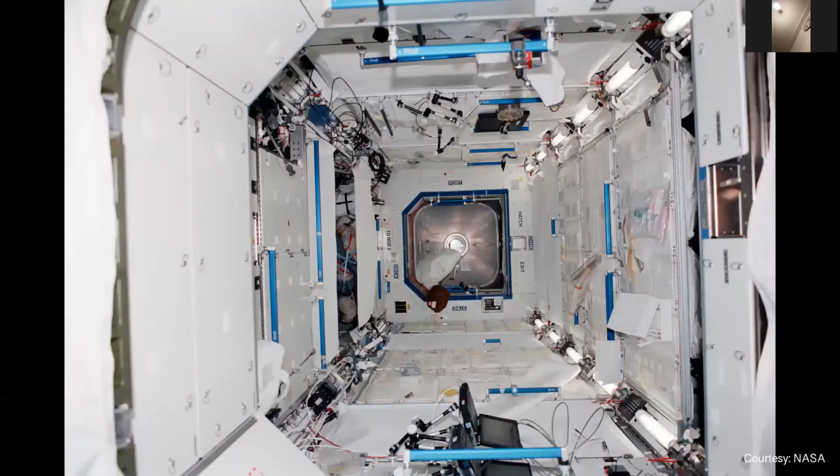So this was the movie 2001 as a short introduction of what people are thinking of when they probably visualize space architecture. In 2001, this is the Destiny module of the International Space Station. So this is what we got in 2001, not this grand structure, but the International Space Station and this particular module.

You also saw before the shot, it was very pristine in the interior. It looked very clean, as does this module when it was delivered to the space station. And then this is what it looks like today. Sometimes, not all the time, but you just have to imagine. Sometimes we think, oh, it's all messy and it's crowded, and it's true. But we also have to think that the space station is now 25 years old, more or less.

It has no wireless connection, so you have all these cables here. Astronauts are constantly rebuilding, doing different elements, and there's hardly any download capability, meaning there's lots of stuff coming up, but hardly any stuff going down. All the trash—you can't just burn everything in the Earth's atmosphere, because a lot of things you'll also need maybe more than one time. So it's like, just imagine you're living in a small flat, and you don't have any place to put things, you've been living there for many years, and things accumulate.

What's interesting is that in the 70s, jumping back a little bit in time, there were a couple of concepts which are also sort of eclectic and grand. This is the Stanford Torus. This was actually conceived at Stanford. It was a NASA-sponsored program in 1975, and it also used the concept of a torus, right?

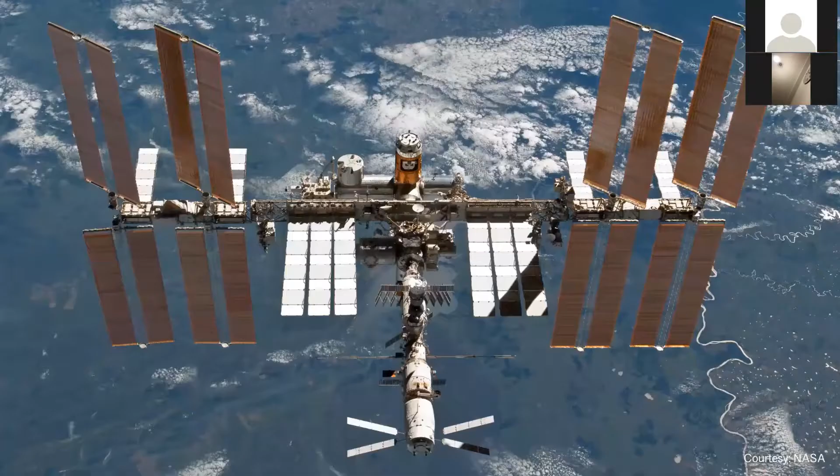So you see how imagination and reality, how different they are, but also how they inspire each other in a way. So let's look at the space environment, distances and destinations a little bit.

Then we have low Earth orbit, up to 2,000 kilometers, and within that is the International Space Station. So the ISS is actually very close, super close - just a distance between Rome and Modena. If you imagine Rome to Modena, maybe a 4 hour drive, and then you just go up a little bit instead - there is the International Space Station.

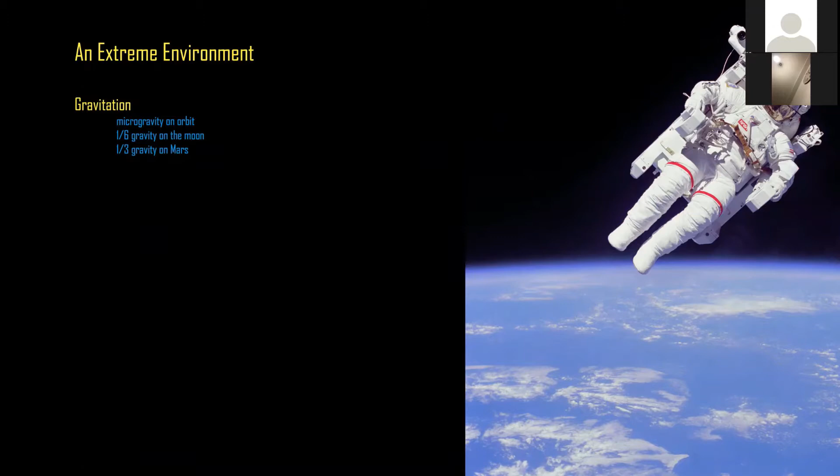Outside temperatures are very harsh, very extreme - minus 156 to plus 121, depending of course on the material. And towards the black universe, you have minus 250 degrees Celsius. So there's a lot of different temperatures.

So when you look at that spacesuit, let's look at that - you see some sun here, you see some shadow here. On the back side it would be very cold, on the front side it's very hot. That's why astronauts wear underwear with water-filled tubes to modulate the temperature of the body. And of course these suits are completely airtight - it's a pressurized environment, a small spaceship, because you have a vacuum outside, and that makes for extreme temperature but also pressure differences. You have zero pressure outside, and maybe 1/3 to 1 bar inside the spacesuit, depending on your oxygen levels.

But already in low Earth orbit you have to take care of micrometeorites - high-speed impacts of grain-size objects. There was, I think it was Luca Parmitano, when he went out for a spacewalk, he could see bubbles coming up from his glove's thumb or finger. So he knew there was a leak in his glove, and what did he do? He said, 'Houston, I'm coming back,' and immediately went back to the spaceship. So it's a quite dangerous environment.

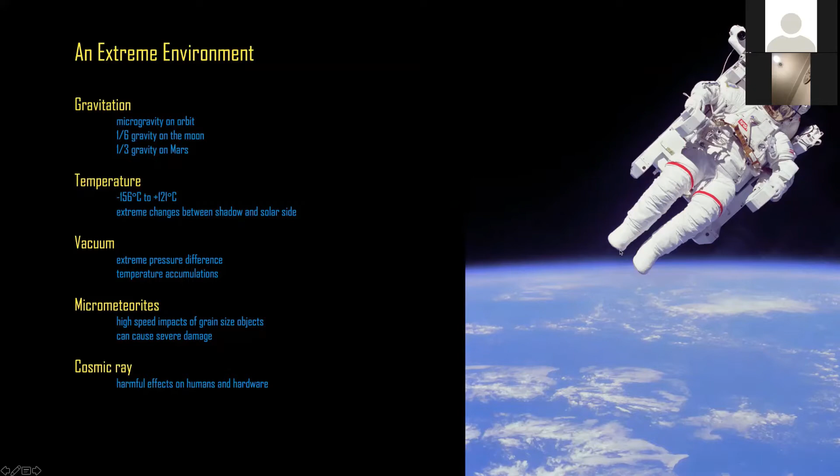And you have cosmic rays, because you're not protected by the Earth's atmosphere anymore, so you have larger radiation which you have to protect yourself from.

So that leads to a couple of challenges for building and living in extreme environments in space. First of all, you have to transport large distances. You have to always think about what do I really need, what do I need to supply, can I recycle everything so I hardly need any supplies. This is an important issue, the recycling, and Anna Maria mentioned it in the introduction. This is one of our concerns. When on Mars, you probably have a delayed communication, so you have to be very autonomous, very independent. You have dynamic launch loads, so you have different things to take care of, and you have a shortage of space, meaning a minimized space.

That could lead to a strategy, an architectural strategy about deploying and transforming elements. So I don't only have one chair, but a chair could also, on Mars or in zero gravity, transform into something else, into a bed or so.

And one would also look, as you can see here in the image, at building with in situ materials. What materials do I have locally, and how can I build structures? We know this from Earth, because when you look at, let's say, Mali and all these mud clay houses, these are really in situ buildings. There are these artisan and adobe houses, we also know that from North America. This is probably a strategy we will also follow when we go to the moon or to Mars.

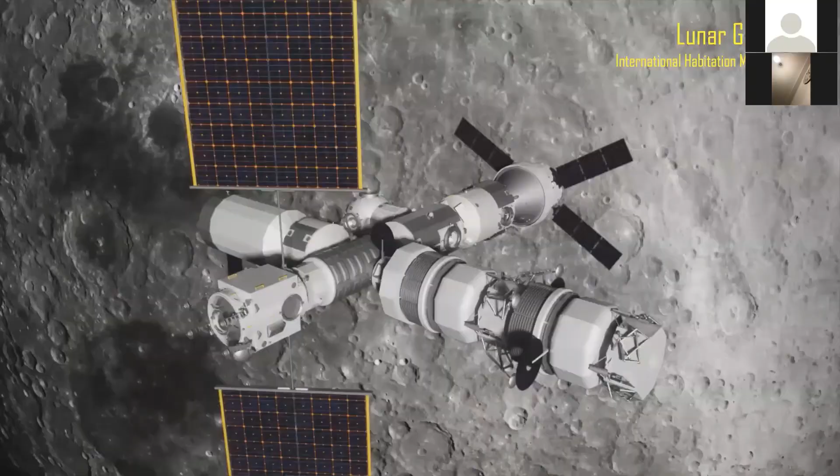I'd like to start with a project. So with this introduction, you have a little bit of a feeling for the requirements and the parameters we need to look at when we design for space. I'd like to show you a project, the Lunar Gateway, which Anna Maria mentioned. We are currently working for Thales Alenia in Turin, because they are building the International Habitation Module, and we are doing the interior configuration design. They are not only building the hull, the envelope, but also the interior, the full thing.

Here is one configuration, and what I'm showing here is actually our previous study where we worked with Airbus and Thales Alenia on the project. It's a small configuration. This is the International Habitation Module, this is the stack for the lunar lander. You see here the legs and some other modules. This is the Orion here, this is the propulsion module, and these are other logistics modules.

The final configuration, to be honest, is not set yet, so there's always room for changes.

I'd also like to mention, because it sometimes gets mixed up, that Artemis is not Gateway. Artemis is the American program, and Gateway is the international program where Europe plays a main part. The interesting thing with Artemis is that these women are all candidates to land on the moon, as Anna Maria also mentioned in her introduction. First we will see in the next years the first woman walk on the moon, and they will also probably visit Gateway and the International Habitation Module.

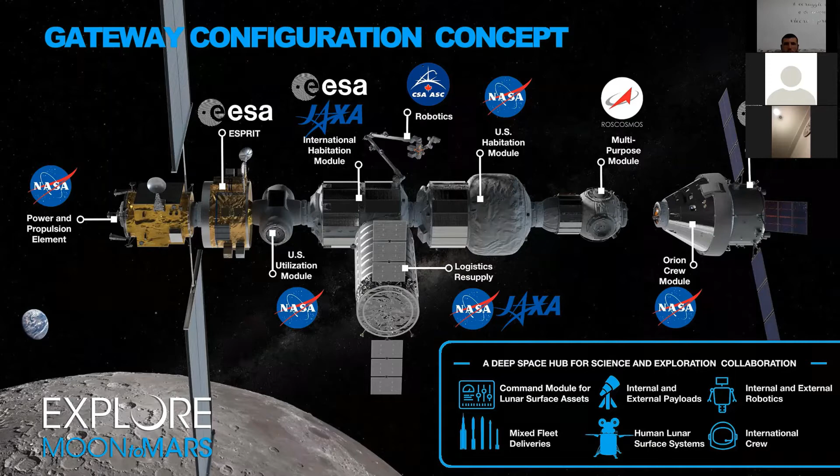This is another configuration for Gateway. It's larger, and you also see here that there are different ESA components. It's mainly the space station partners, NASA, JAXA, Canadian Space Agency, maybe Roscosmos, also not sure yet. So it's basically the same big consortium which built the International Space Station.

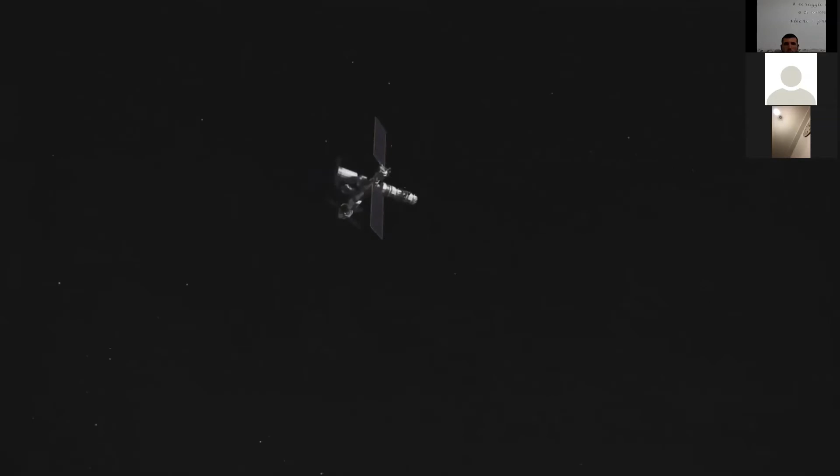I'll show you a little animation from the design, which will explain a bit more about the actual design we did. While the space station is in low Earth orbit, Gateway is much further away, 1,000 times further, so it's a more dangerous environment. There are many unknown factors, and before going to Mars, we really need to learn how it is to go around the moon, to be in this more extreme environment than low Earth orbit, with more extreme radiation, and to train for this.

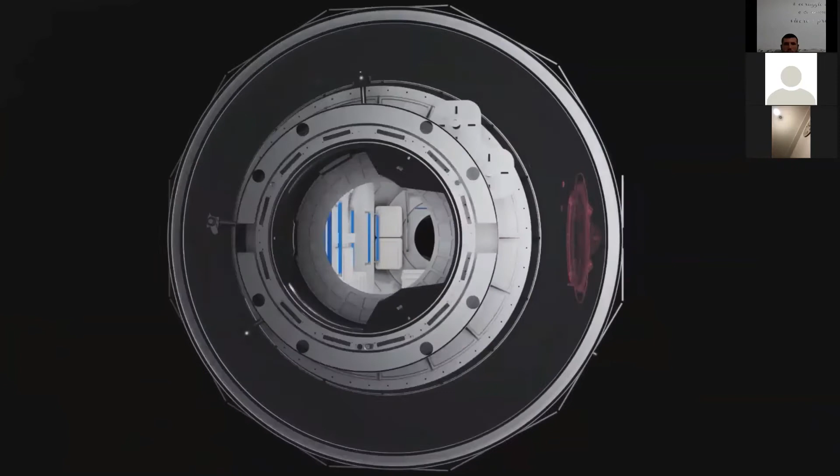So here you see this is the International Habitation Module. This is the current version we're designing. I can't show you anything of this, but this is an older version, and it shows you what the crew functions are - exercise facility, crew quarters, galley and science. So everything a crew needs to inhabit a space like this is packed into one module.

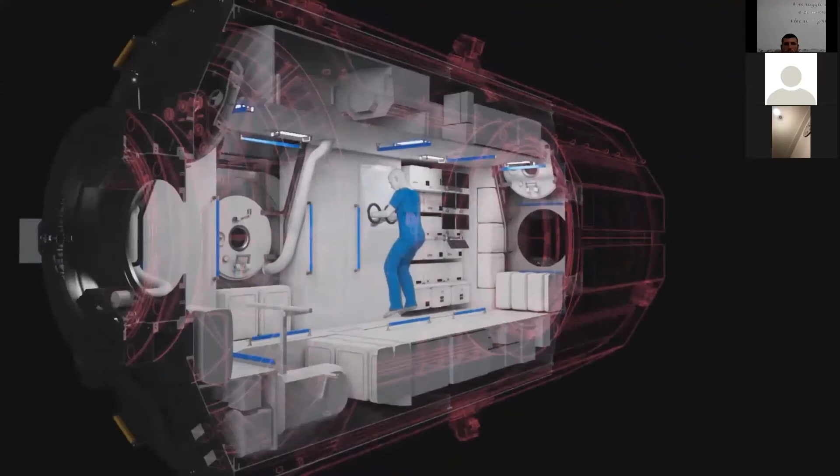This is 5 meters in length and 4 meters in diameter, actually 3 meter 50 in diameter, and now we had to shrink it even a little bit more. So you see it really is a very challenging design task.

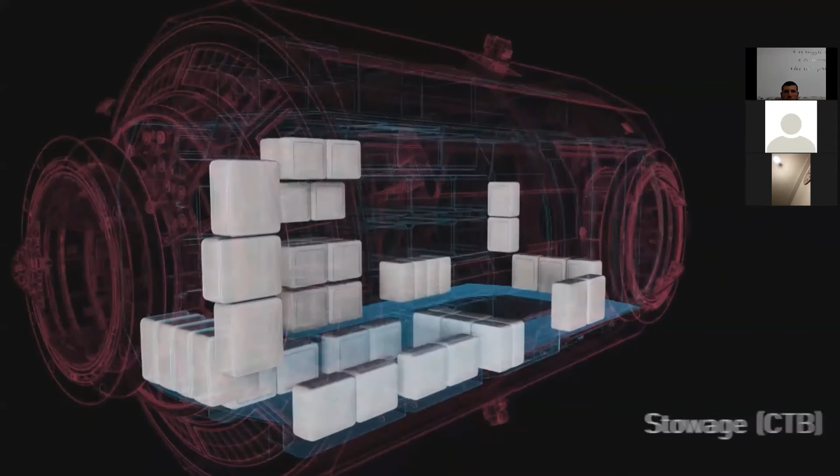So what does a module like this comprise of? What are the main elements? Very important is stowage - we always need somewhere to stow supplies and food. We'll also have a little kitchen, a galley with a food warmer, and a trash compactor. We'll have a table, very important for social gathering, for having the crew of 4 come together for dinner.

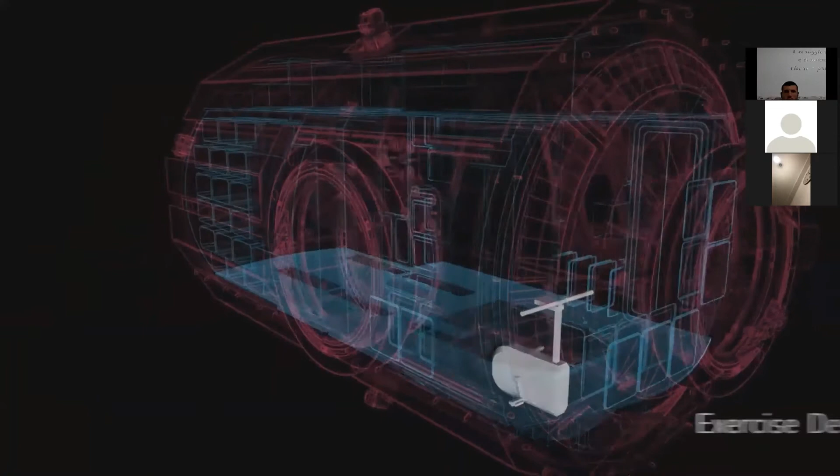Exercise facility, we have crew quarters, and here you see this is deployable. So we try to have one status of the crew quarters during the day, and during the night the private spaces become more important, and the crew has a larger space to sleep in.

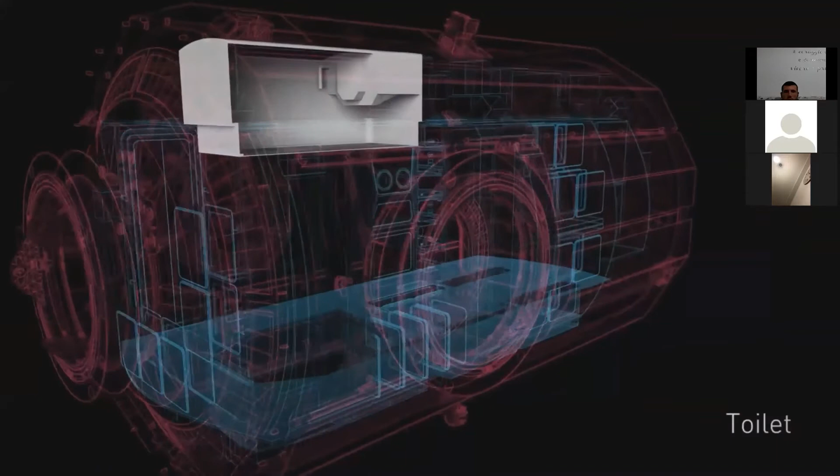There's the toilet. It's also deployable because only when you need it do you have a larger space, and otherwise it's really smaller. This is the glove box.

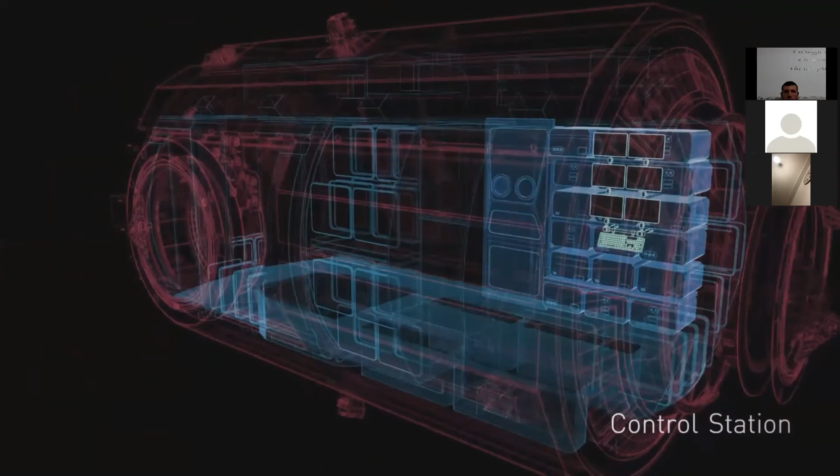So this is the science equipment, basically right next to it, and the control station. We assume the station will be controlled basically by tablets. These are system boxes and the life support system, and together they take up quite a lot of space.

And currently they are developed by JAXA, the Japanese Space Agency. And this view really gives you a glimpse into the small space.

The good thing about zero gravity is that space appears to be much larger because we are floating and we can access all different sides. You saw that with the toilet - it was on the top, although there's no real top. And it's important that the crew can come together and exchange stories, maybe talk about the day, and have a dinner together.

So this was a design we are currently working on. It's going to be real flight hardware in a couple of years.

Before that, going backwards a little bit in the timeline - we were working on other projects which led to our engagement in IHAB. This is the project SHEE, the Self-Deployable Habitat for Extreme Environments. This is really about the deployability of spaces. SHEE is meant to be a test bed.

You see that in the simulation - it's a test bed for simulations on Earth. This is in the Mars analog area in Rio Tinto in the south of Spain, in Andalusia.

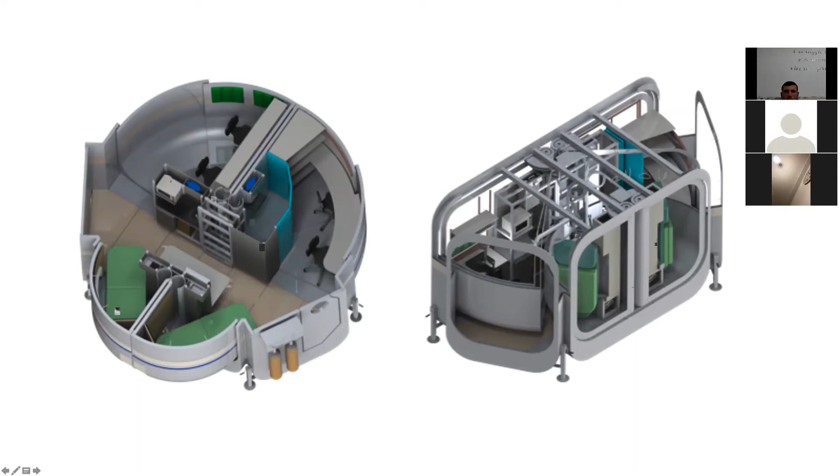And then it looks like this - this is it being deployed. This is during the making, and here you see a little glimpse of the inside. You'll see more later. That's why you can transport it on land to different analog sites to use it as a test facility.

On the other hand, you can dock different SHEs together - SHE is a nice word, right? It's not he, but she. And you can also put it, you know, back to back into a large launcher. This was the Energia, but it could be any other large launcher. It's 6 meters in diameter here.

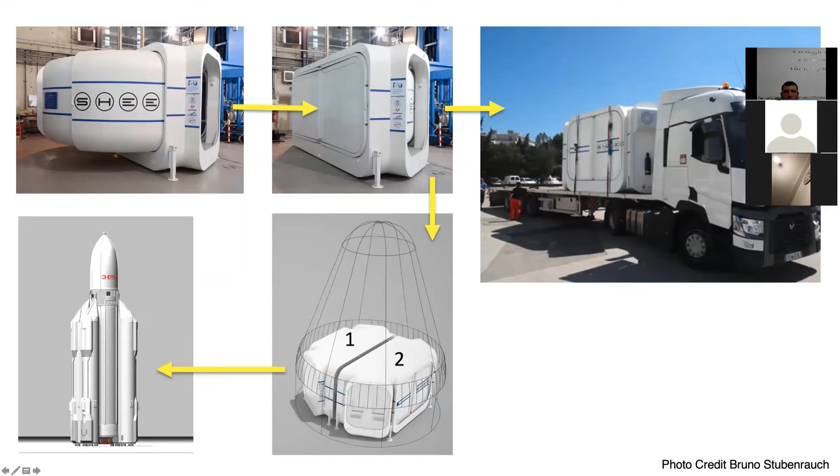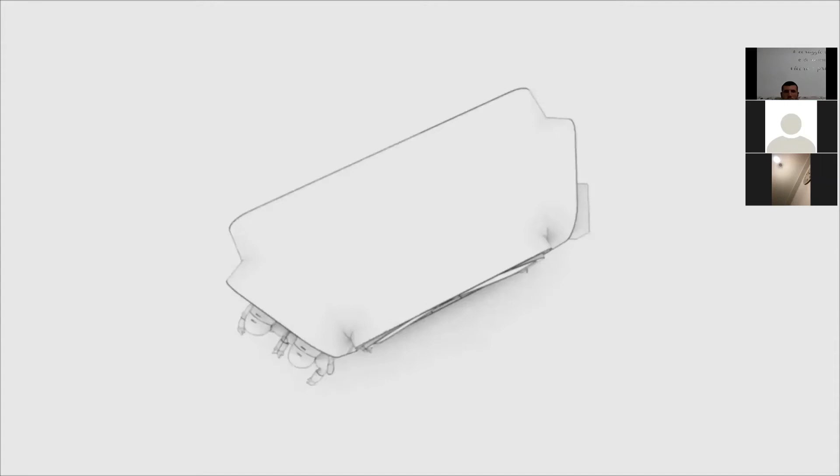So from this, I'll only show the deployment mechanism. I shortened it a little bit because of time, so here you get a little bit of a glimpse of how it's being deployed, these petals. The middle is sort of the size of a standard ship container. Here you also see the suit port.

This is the galley, so this is where people come together and sit. This is the public area, sort of, which is very important. And here are the private areas.

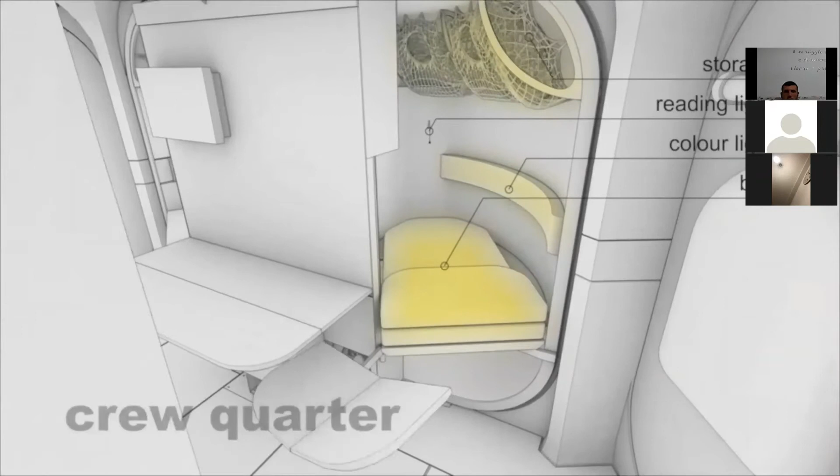Because of the space and the way it's designed, I lived in the SHE, and I have to say you hardly hear anything from the other side, and it's all without doors. It's just through the shape and the geometry. Here's the work zone; we also established acoustic panels here.

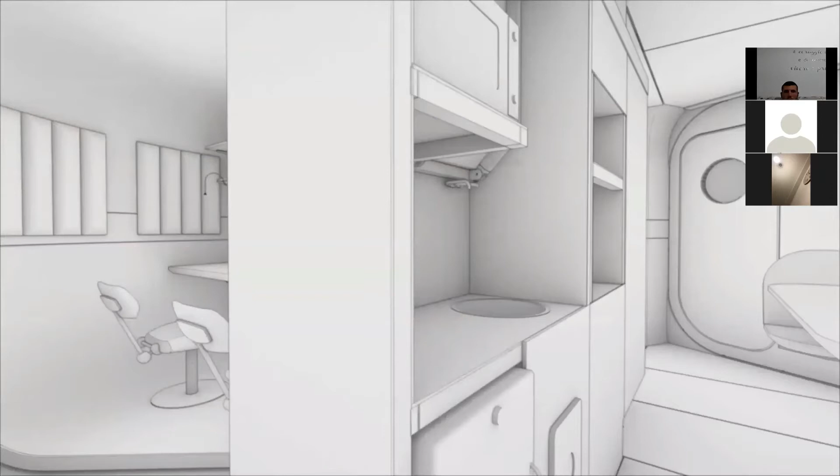I hope the video runs well. And this is the middle zone with the small galley, the refrigerator.

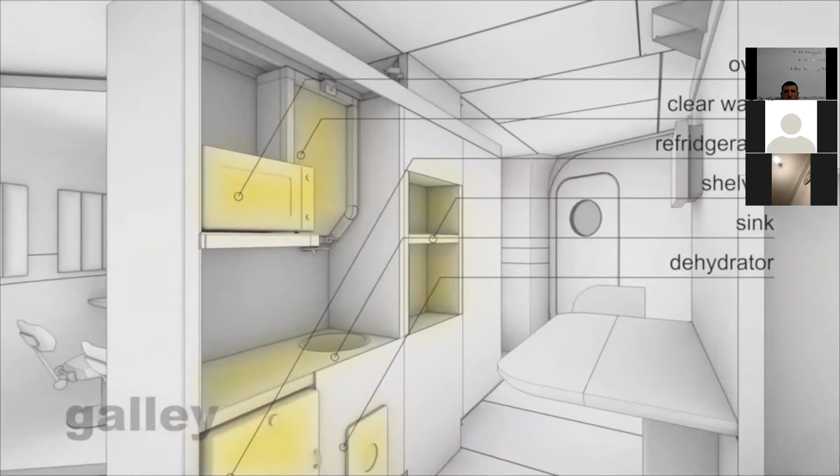You see that most of the elements are always the same, right? We have a kitchen, we have a bedroom, we have a workspace, and this applies to all environments where humans live. And here you see the little workshop, the wet compartment, as we called it, and the hygiene compartment.

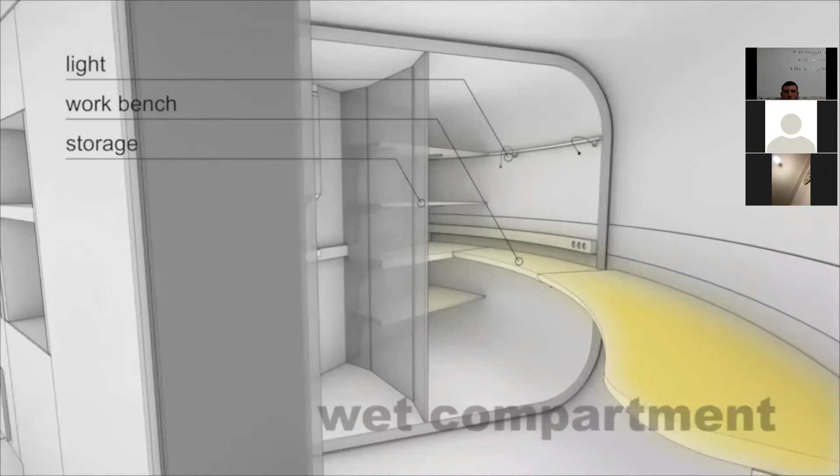It's also foldable, but you see that it's sort of transformable, deployable, foldable, just to be able to compress it in this small central area when being stowed and transported.

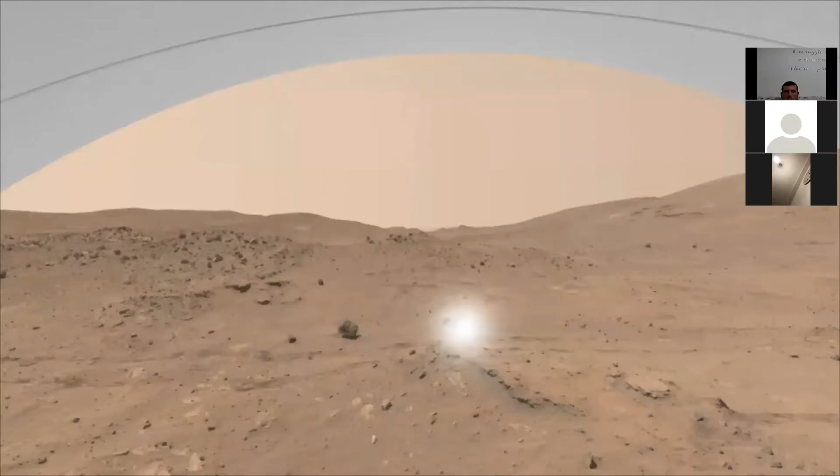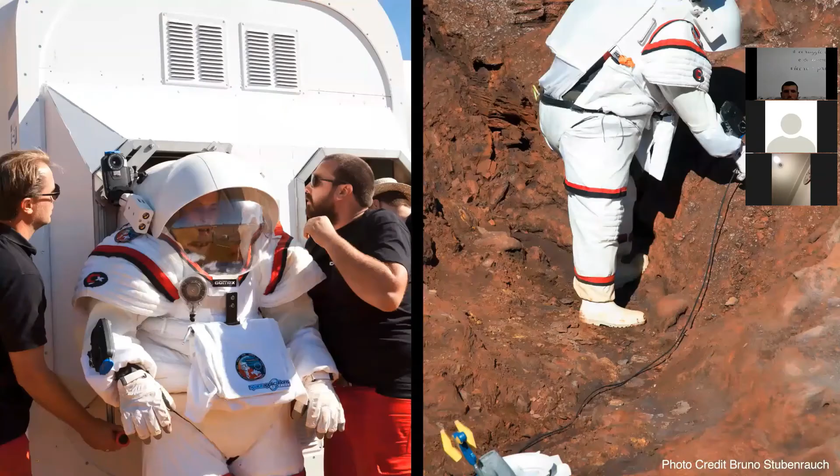Here are the medical doctors testing the Simonaut, the simulation astronaut, before they went into the simulation. These are operations of getting into the suit port, docking from the habitat, and exploring the surface.

So what we didn't have with SHEE is we had a living area, we had sort of a working area, but we didn't have a food area, because humans need food.

It's in its 4th year, I think, already. And...

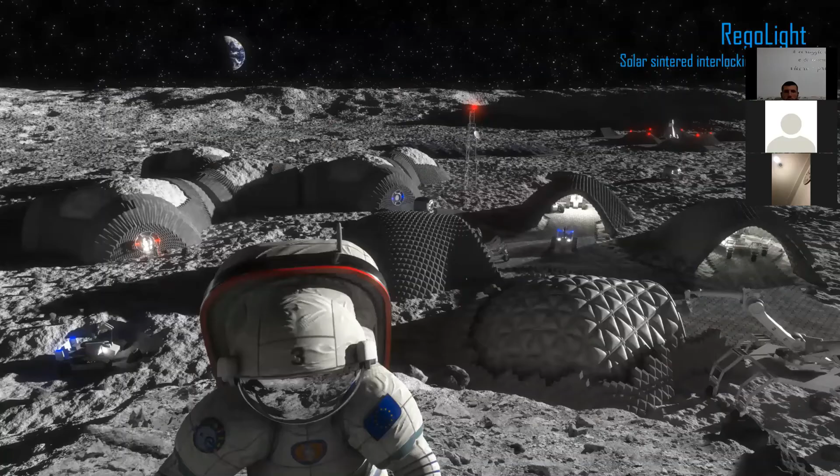So now we have the habitat, some workplace, we have the greenhouse. And when we look at our next goal, the moon, the surface of the moon, then we also have this very harsh vacuum environment. We have micrometeoroids and radiation, and we have to protect ourselves from that. So we need some kind of radiation and micrometeoroid shelter.

And we can do this using in situ materials, so we can use the soil, the material from the lunar surface. And we were part of a project called RegoLight, and it was about solar sintering, interlocking elements.

To be honest, I just see that some slides are missing, so let me try to explain without these slides.

Solar sintering is a method where you concentrate a solar ray and it falls onto a sort of table, like a 3D printing table. It's an additive layer manufacturing process where a layer of sand is put on and you glue these layers of sand together until they reach a solidity like this one. So you only need the sun and the sand, these two components, and they are for free, in abundance, available on the moon.

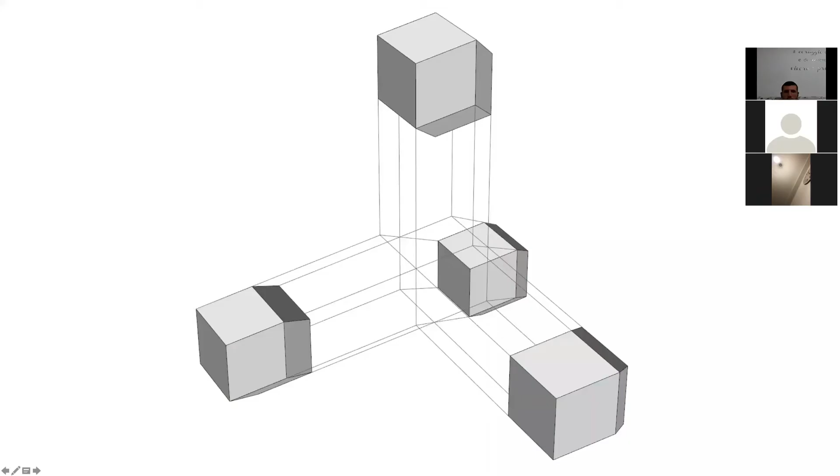You see these are all stacked, they're interlocking, basically, like these. So when they come together, they look like this. They are rhombic dodecahedrons. This is a space filler geometry, which is also used for packaging. There's zero gap in between.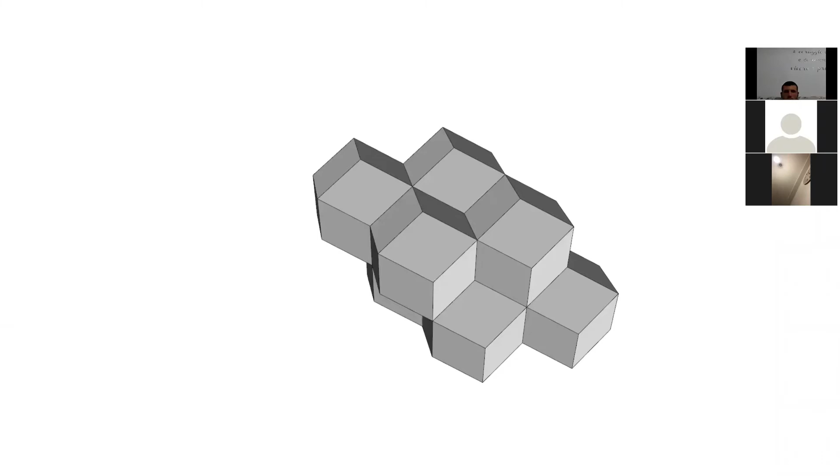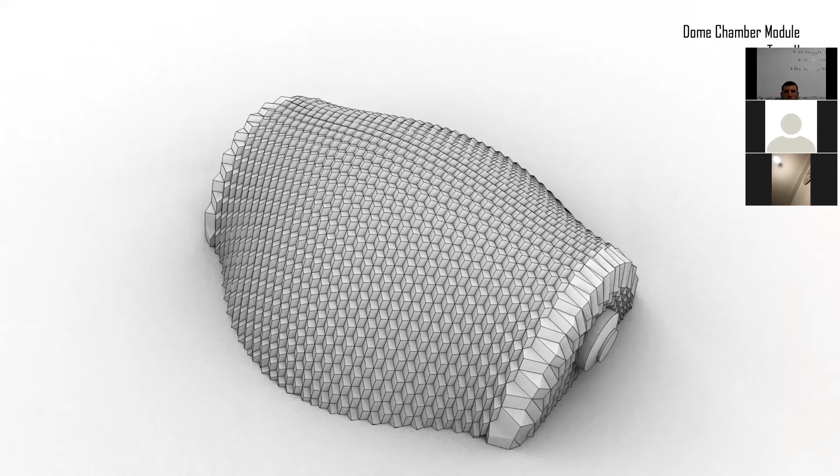And then we tried to find sizes for elements so that they could be a little bit larger, and then finally form different kinds of dome geometries, so we wouldn't need too much scaffolding or substructure to put on top, because it was self-sustaining. And then we looked at different geometries with connection points. So here's one connection point, here's a second one, then a shape like this, or three connection points. And that's what you also see on the final image, basically.

And this is how we then thought the whole configuration would look like. So we would have inflatable structures here in the middle. Through the connecting points, we had transitioning modules. We had a cupola here, and then the protection was the in situ solar sintered envelope.

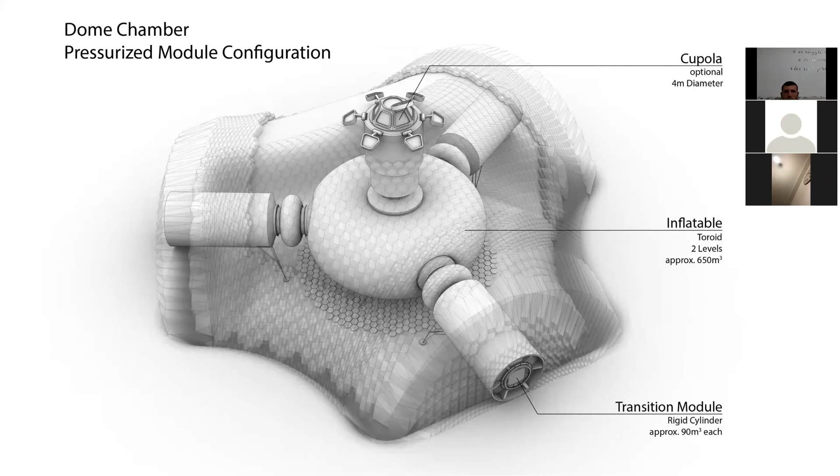So I'd like to recap a little bit, and I also have backup slides if there are any questions. But when we look now at the elements we need for a Moon or Mars base, we need some stationary elements.

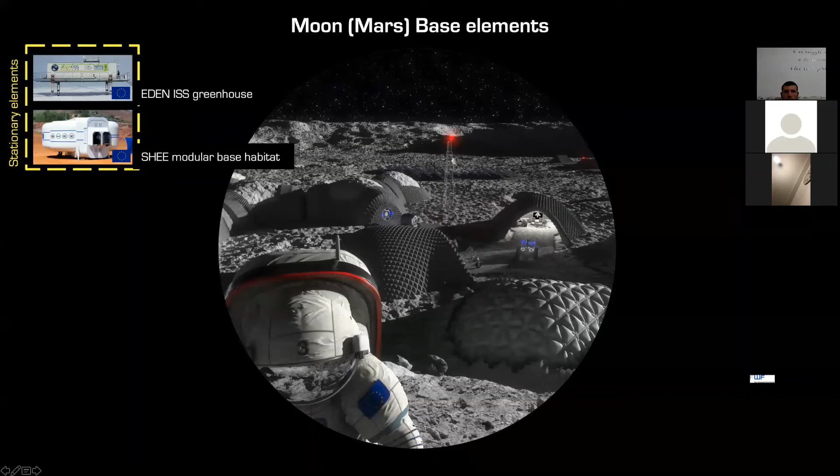These would be habitational or inhabited domes, and in there we would have a greenhouse, maybe a modular base or some inflatable structures. We would have mobile elements like rovers, smaller rovers, and a pressurized rover, an excursion vehicle like this one. This was also a project we did with Thales Alenia Space in Turin for ESA.

And we would need EVA tools. There's one project, Moonwalk, which you saw briefly when I explained the SHEE module, where we also did simulations underwater, and we designed these tools for astronauts, especially for the lunar surface.

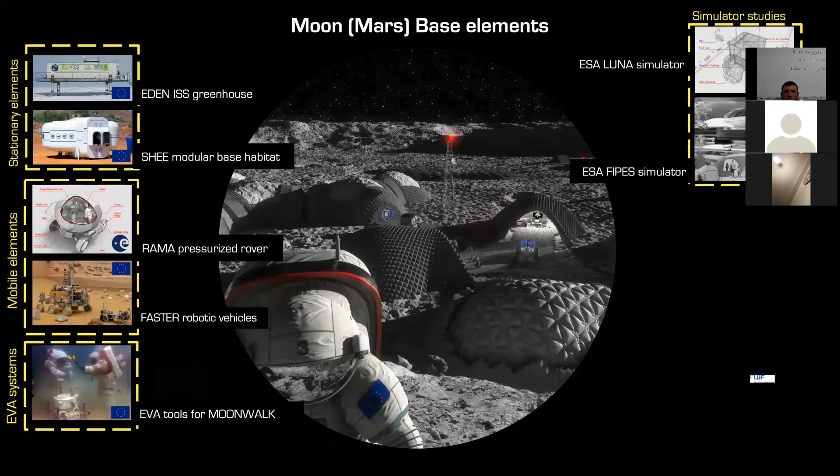Then, before we start creating a base like this, we have to do simulator studies. So you see here a couple of simulator studies we did for the European Space Agency in the last, I would say, 20 years.

Another topic, and this concludes the overview in that sense, is in situ resource utilization, which addresses the project RegoLight, but also a Mars project we did, Lava Hive, which won the second prize in the NASA 3D printed habitat competition.

But we're also looking at nature and biology, trying to analyze or translate biological systems into architecture. And that comes in handy when we look at bioreactors, which can recover resources and integrate them into possibly life support systems.

And all these projects we have already been working on are an instrumental part for a lunar or Martian base.

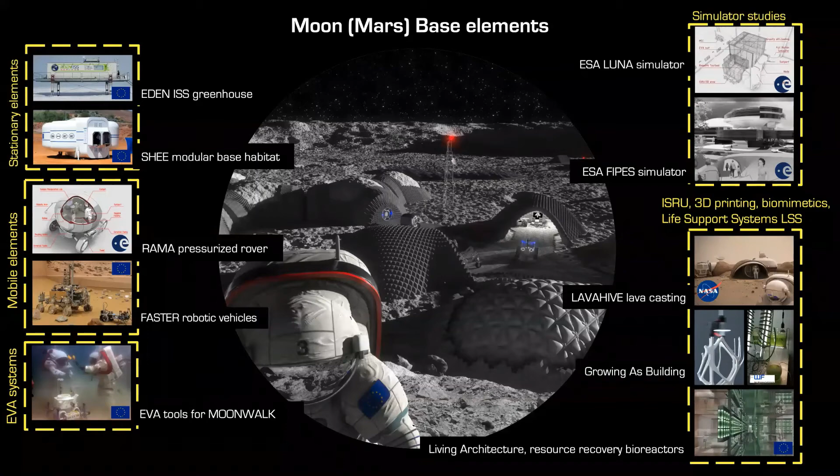At the same time, the topics we are concerned with, like the limited space, the shelter basically, or the waste management, water, energy, air, these are all topics which are very important for today's cities or for the development of our environment here on Earth.

And so in parallel to all these space projects, we are also working on a project called The City as a Spaceship, where we look at self-sufficiency, sustainability, resource recovery and recycling, and see how we can also apply the concept of a spaceship to a city.

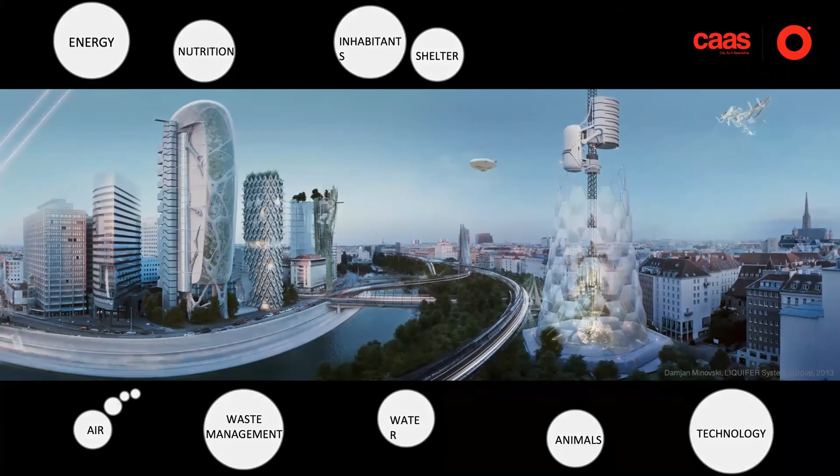And yeah, I think this was the last slide. With this, I'd like to thank the whole team. I'm now open for questions. Thank you for your attention.

Thank you, Barbara, for the fantastic presentation. It was a very dreaming presentation where the science fiction novels seem our reality today. And it's important to highlight what I introduced at the beginning, the importance of an interdisciplinary team, because you have well addressed the importance of knowing from different angles of view. This is very, very important.

And also about the very difficult environment that we know very well by manufacturing our satellites, but it's very difficult for the humans that have to live outside. Very nice, very nice, also the architecture in a small space in order to be efficient, to have all what we need. I think we can stimulate a question that can be submitted directly to you, Barbara.

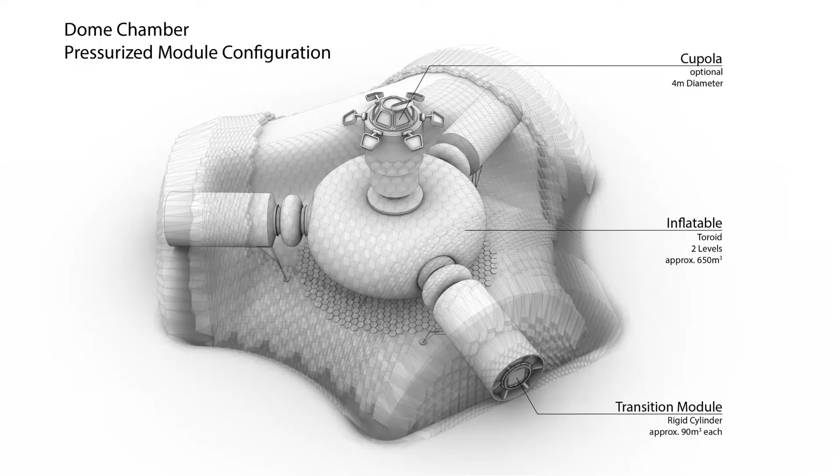About these works, I mean, we were testing specific greenhouses for cultivars, for growing crops like tomatoes, potatoes, some edible vegetables, as you showed, and different ways to grow these vegetables without gravity, without soil, with very little consumption of these fundamental resources. My question was if you had contact with this group, and if you could be interested.

Which group are you referring to? The Italian group? No, the group in ENEA that works on these activities. No, I don't know these people. Okay, the name of the group leader of these things is Eugenio Benvenuto.

We worked with CNR on this, with a couple of Italian partners on this greenhouse. There was TASI on the life support system side, and CNR—I don't know exactly, the Italian National Research Agency, I think it's called, I don't know the Italian name.

So it could be interesting to have some collaborations. I know also that they have done some experiments at the base in Antarctica about this kind of special greenhouse. This was a very large project, with a lot of partners. I would have to look them up.